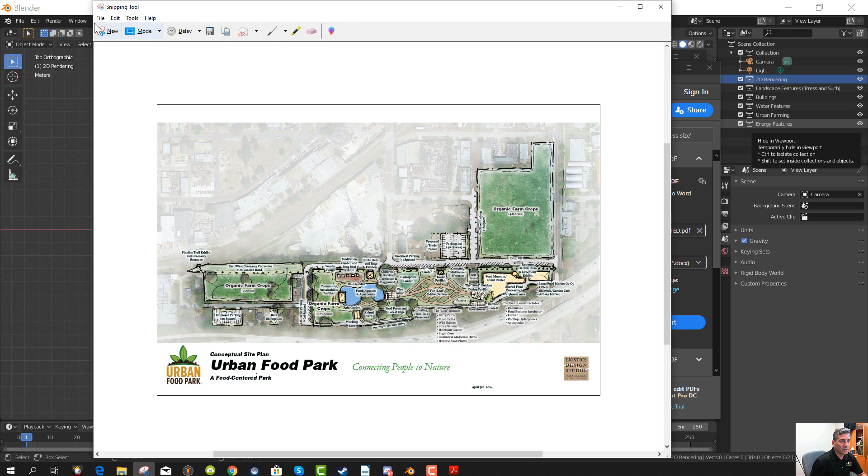Having taken that image, save it and find a place for it. Where am I going to do this work? I'm going to do this work in our Blender GIS files. A PNG file is fine, it's better than a JPEG for this kind of work.

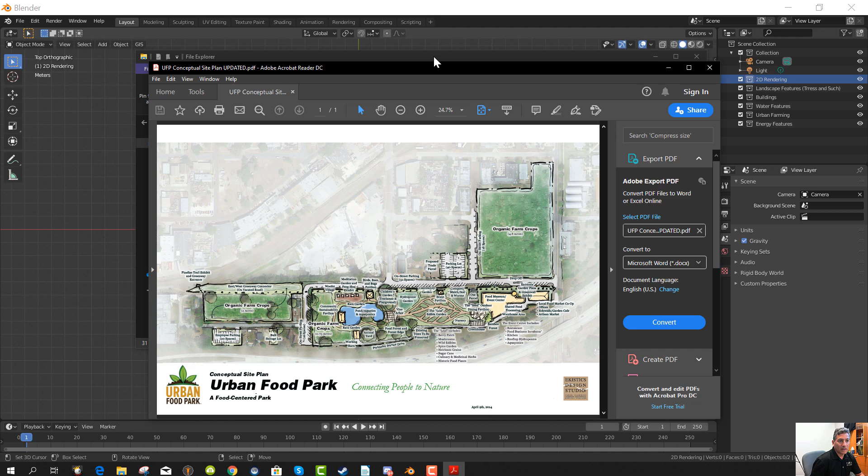So we'll call this Urban Food Park Conceptual Site Plan, that's what it is. A food-centered park, and bada bing, there it goes in there. We don't need this anymore, and we don't need this anymore either.

Because we're not using the PDF. And if I now go in File, it was in File Explorer and I couldn't find it, but let's do that again just to make sure we are in Blender File View. And I go to, it's no longer in Downloads, it's Blender GIS files, and it says export Rosebud, continue, urban food. There it is, the site plan, and load that reference image.

And there it is, way up there. So it's in the wrong place. So let me move it down, unless, well, you know what, maybe I should keep it there because while I don't think it has any GIS information, it'd be weird if it did.

So that is now in this collection, 2D rendering. And if I turn the 2D rendering off, it disappears. So I'll keep it there just for giggles.

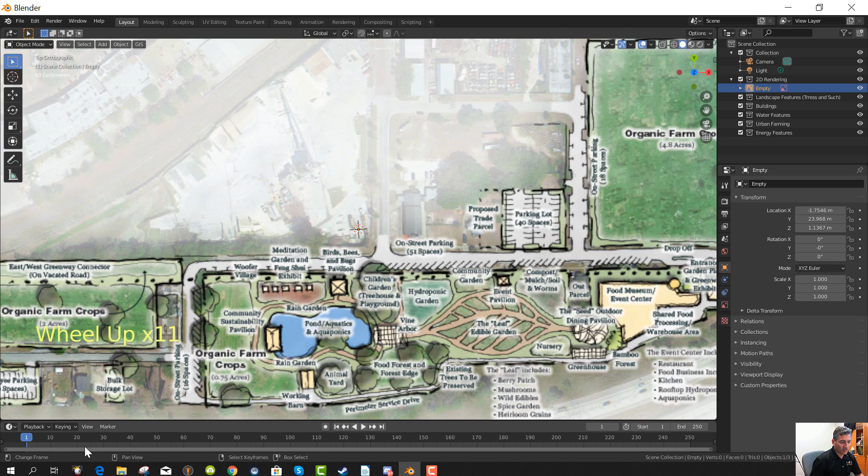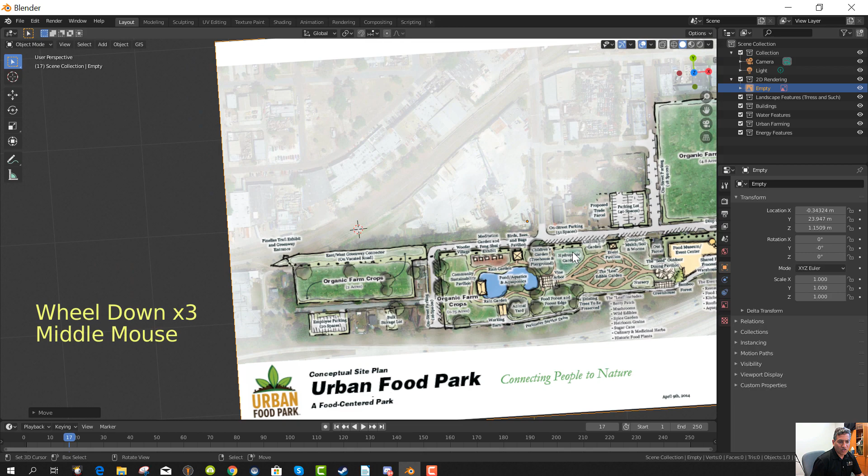Let me just zoom in here and see. So I hit the number pad 0 and look, what does it really say? Oops, I don't want to twist it around. It says, Pinellas Trail Exhibit and Greenway Entrance. So it's near the Pinellas Trail. Is there any other geographical information we can get off this to know?

It'd be nice if people would just tell us, but they haven't. It says on the outskirts of St. Pete. But we can play sleuth and figure that out. So in this case,

Let's go to, for the moment, let's go to Google and let's say Google Maps, as if I could spell Google Maps, but this machine is so forgiving, it does spell check for me. And let's go to St. Petersburg, Florida, and let's turn on the satellite image. And there's Pinellas Park.

And the satellite image should be coming up now. So the question is, where is this? And so to find out, we go to the documents they sent us, and we look at what they're telling us here, that the project summary says it's a community-based, vertically integrated urban agriculture and food complex, bringing together in a 14-acre park all aspects of the farm-to-fork food cycle presented in an engaging and entertaining format. It'll add cultural tourism destination to Pinellas County, local, regional.

It'll be operated as a zero-waste facility, enhancing St. Petersburg's reputation as Florida's first green city. It has edible botanical gardens. It'll be near the I-275 and the Pinellas Trail, and it'll connect and provide additional traffic to the existing Warehouse Art District and the Deuces, promoting the growth and development of surrounding neighborhoods. So they have this synopsis of all the different cool things that are going to be there, including health and nutrition, business philosophy.

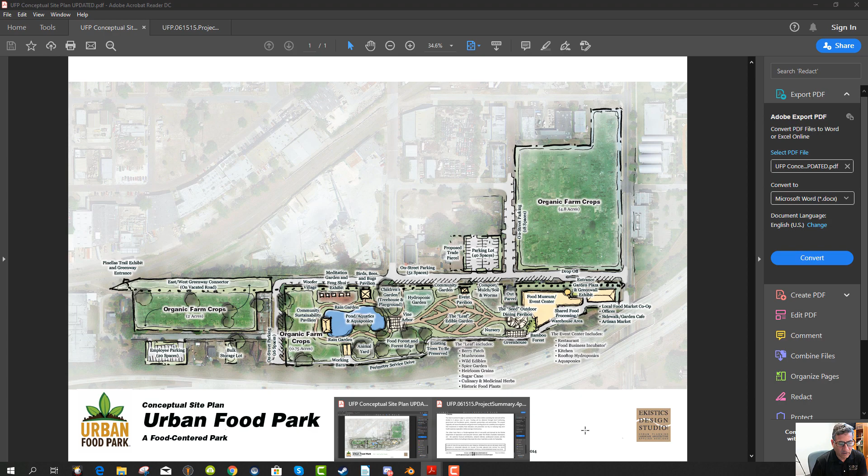So they say they have, in this document, there is also a Facebook group, Urban Food Park. So if we go to the Urban Food Park Facebook group, then we see information about it, and it tells you that its address will be an educational organic vegetable farm, the 15th Street Agri-Hood.

Now that might be what's already there. It might not be where they're going to develop this. So we still may have to do some hunting. But it gives us some idea of where they're already working. And if we click on this, we see the actual 15th Street Urban Agri-Hood that they've started. Hard to know if that's the actual place where they're going to do this project, but it gives us something to look at. And so we can take the address here, and we can now go into Blender, and I did this already, but I'll do it again because you should see how it's done.

So what I'll do is take my GIS, go to Web Geodata, to Base Map, Google Satellite, and so let me go back and show you that again.

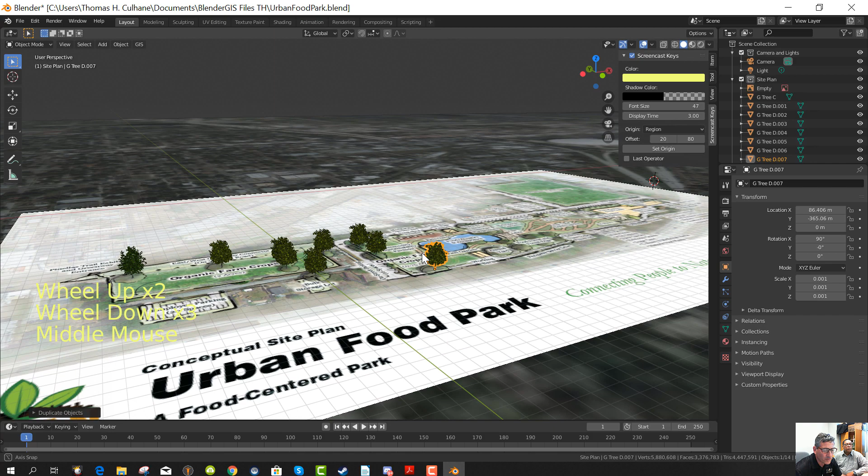Now another feature that's really neat about Blender's new edition with the GIS is that we should be able to go in and get building information and make our building heights, let's make them a little lower. I don't know if this is going to work or not, but we're going to try it and bring in these buildings. Did it work?

It did not work. Where are you getting the buildings from? GIS has it, they have the buildings. So something went wrong there, not sure what. Let me try it again. Building, go to my OpenStreetMap, click on buildings, elevation from objects, separate objects.

Maybe because the map is too big. That does happen, when the map is super huge like this, the buildings often don't come in. So the way to do that would be to get my buildings. So I'm going to temporarily... make the map smaller? Yeah, I got to make the map smaller.

And I don't know how to make it smaller once you've imported it. So I'm going to temporarily go into a new file, which is helpful if you've never seen how Blender works from scratch. Turn back on screencast keys so you have that. So I come in, this is what you get when you come into the program. You go 7 to be orthographic top view.

Delete the cube because you don't need it. In fact, for this purpose, we don't need the light and we don't need the camera because we're just doing the buildings now. Go to GIS, go to get that base map again, and in that base map,

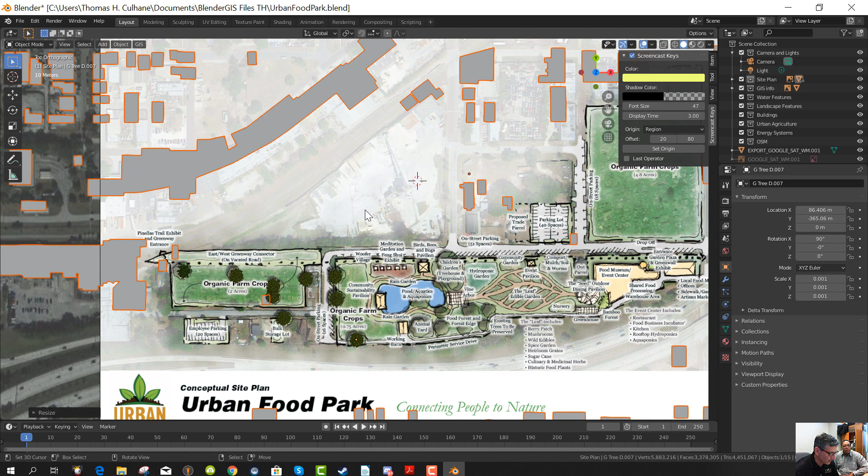But we basically now have the beginnings of a virtual version of that site plan. And all of these features, like rain garden, like trees, are easy, but these buildings don't yet exist. So if I wanted to, I could click off of this and zoom in. Whoops, stop it, shift key, all right.

And if I wanted to build the building here, I would go add mesh plane, move the plane if I can find it. Where did the plane go? Do you see a plane here? I don't see a plane here. I thought I just added a plane. Oh, there it is, there is a plane there.

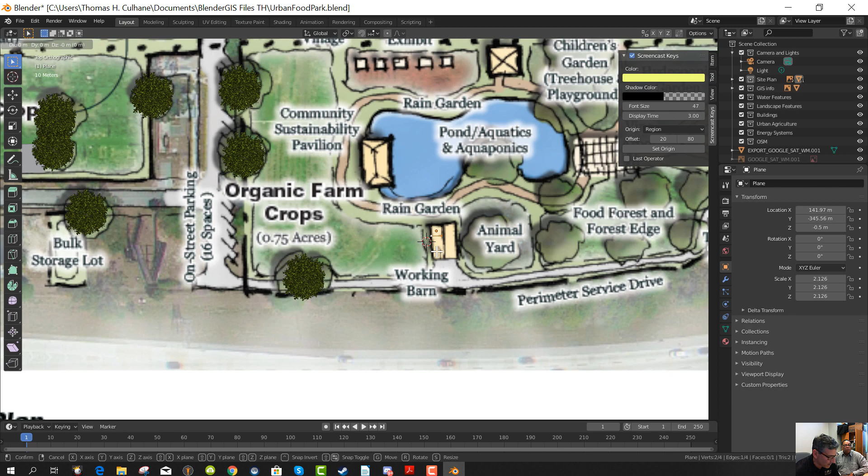Move that plane to here and scale it and move it. So it's this little game, the dance that you play. Go into edit mode and say, what I want is I want to take these two vertices and, whoops, not that vertex, deselect everything. Grab these two vertices and drag them down to make that building. Then come up in the Z direction and say extrude in Z, except I now need everything.

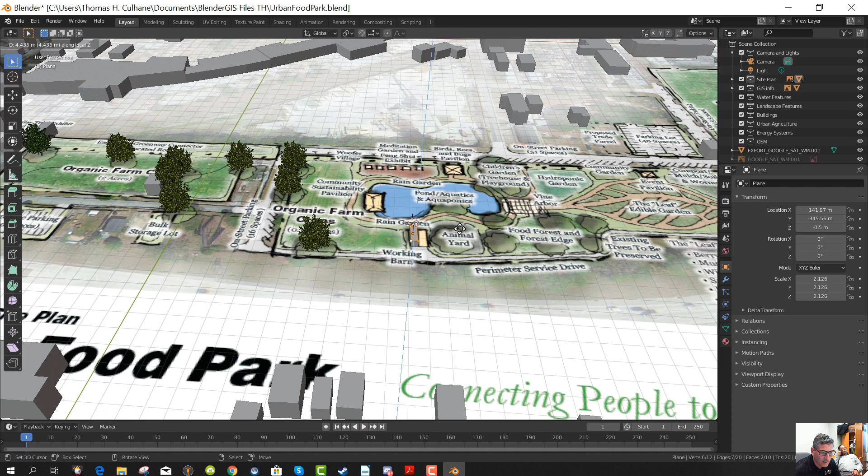Whoopsie, what happened to my plane? There it is, all right. Extrude in Z. And now what I've done is I've created two more buildings. So now I have two more buildings.

And I can select off of that and then do that same procedure again. I'm in TH's office, he's just showing me something on the computer.

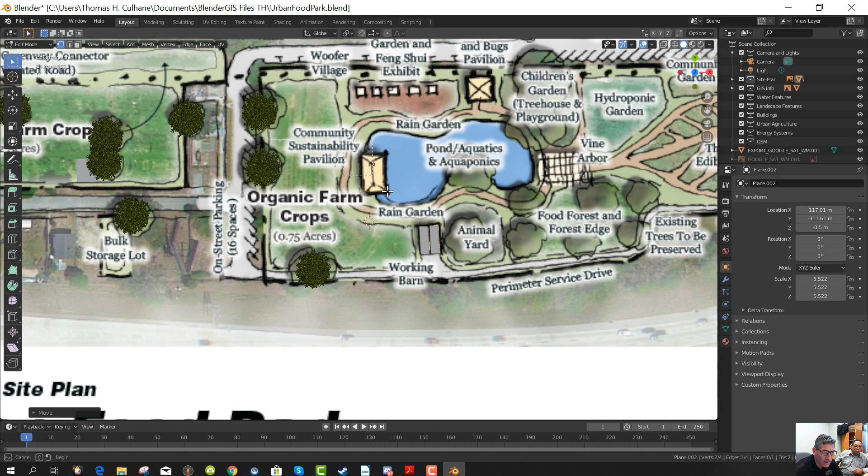A few minutes though, and then take that plane, move it up to here, scale it, move it over, go into edit mode, deselect, grab those two vertices, grab it and stretch it down to cover that building. Now go into select all those vertices, so I have the whole object selected, turn the camera, extrude in the Z direction and build that building, but you'll notice that that building had a roof.

So all I need to do to make a roof here is to hit W to subdivide, and now take these two vertices and do my grab—oops, I need both vertices, shift key there—take these, grab it in Z, and make a little roof, which is exactly what you see if you look at the actual site map: this one has a roof, right? So I just made a roof.

So now these buildings that do exist in St. Pete—we pulled these buildings from GIS, but these buildings we just made right now.

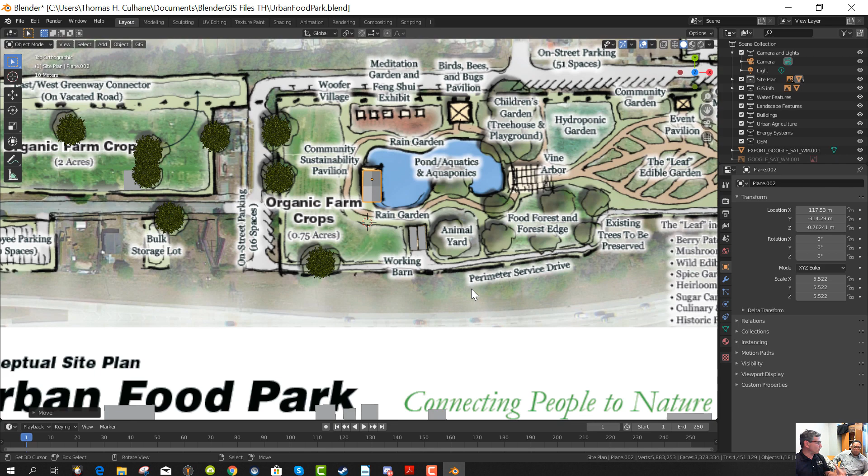And we can continue to do that with all the features of the landscape until we have the entire landscape populated, and then we can get into texturing it and making it look really pretty, adding the water features with the ripples in the water, and adding ducks flying. The last thing I want to show you, that David and I did last night, was in this world we have a camera. Where does the camera go? There's supposed to be a camera here. Where's the camera?

What just happened? Why is my camera way over here? What just happened? Okay, that's really weird. Site plan, zoom in. GIS info. Oh, there it is. So I don't know where my camera is.

When that happens, what I would do is delete this camera and add a camera of my own. Camera. And then the camera should have come in somewhere around here. And if I zoom to that...

Okay, something's astray. It's really thinking. All right, I got to figure that out. Anyway, the point was only going to be... What was the camera for? So I can take a picture of it to do my first rendering and do a fly-through. But something really weird is happening here, and it may be that—let me try to do this again. There it is. It may be that I've set my clipping wrong.

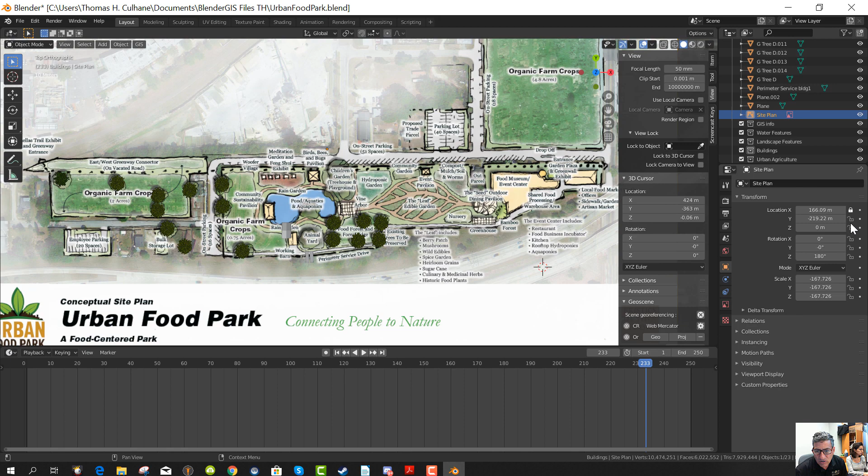So let me deselect everything by right-clicking, and let me now go to the site plan first of all, and lock its location, its rotation, so that ain't going anywhere, and lock its scale so we don't make it any bigger or smaller.

We're also going to take the entire map of St. Pete and lock its location so it's not moving or rotating or changing its scale. So that's locked, and the same thing would be true of whatever this extra texture is here. So now we know we're not going to mess around with that.

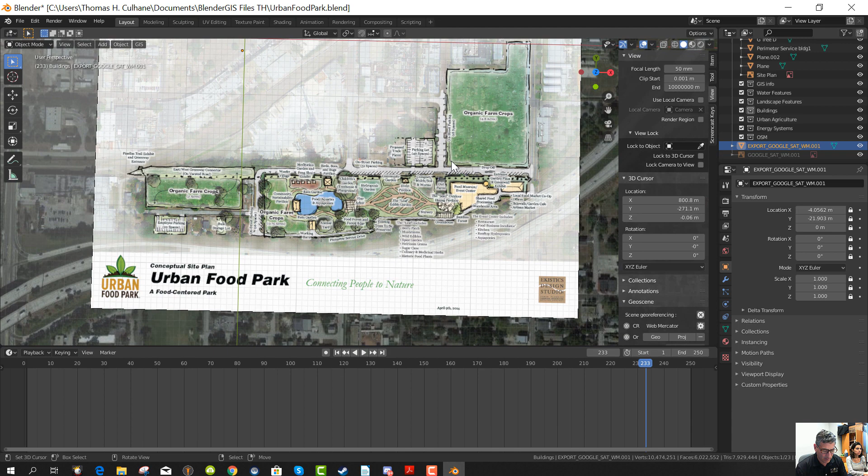And once we get the trees in place, we can select them if we can get to them. Sometimes it helps to go into this view and use your bounding box and select the trees. But it looks like we can't do them all at once, so we'll have to just go through and zip, do each tree.

It's very helpful if you can... oops, didn't mean to make a keyframe, so forget that, that's if you're animating. But lock them, and lock these, and you get the idea. So I've got to go through and lock all of my trees. And I can do that later as well.

And then the same thing with the buildings. With those buildings, the perimeter service building 1 needs to be moved over here. Buildings perimeter service... oh, that's actually the barn.

Okay, so working barn. Working barn. Then, whoops. Working barn is going to go, and it's going to be moved up to here, and then it's going to be locked in place by going again to the location, the rotation, and this here.

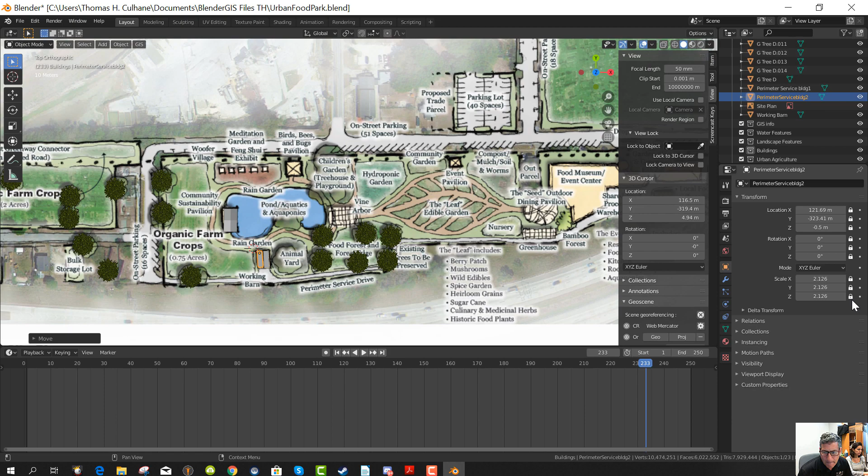And we're beginning to make some headway here. This jittery business, I'm not sure why it does that. It's fairly annoying. Maybe it's the focal length? Nah, it can't be the focal length. It's not the clip or the view.

It's just some weird artifact with the site plan that I can't account for. But we're not going to be using it ultimately anyway. It's just a reference. So in general, the site plan is going to be turned off, leaving us with the buildings and the objects there, so that when we do a fly-through, we see everything.

And why did the buildings disappear? Are they part of the building? No. Camera scene collection. The working barn is there. The site plan is there. Now the buildings disappeared.

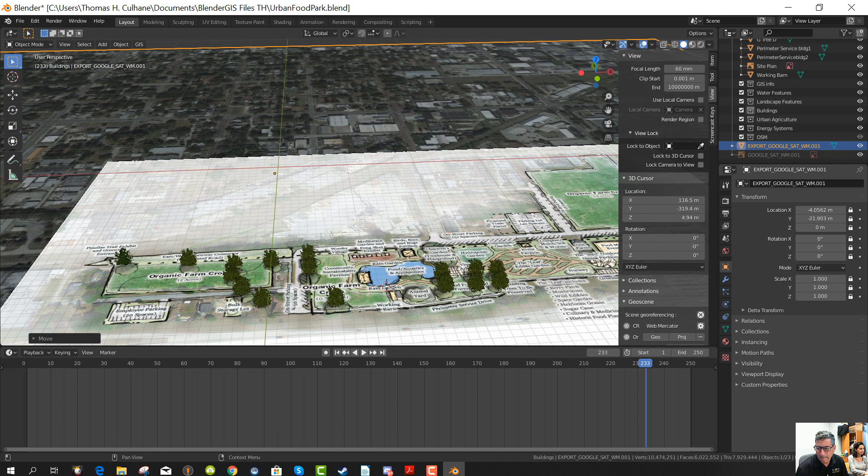It may be that my buildings got erased when I turned off something in here. Well, the buildings disappeared somehow, so I'm going to bring them in again because I made them as a separate file. So I will import my FBX and come over here.

The surrounding buildings, they come in, and are they in the right location? No, they're not. So hit G and move them, and once again, as we showed, we can place them over the image and bring them up a little bit.

So we're getting weird artifacts in rendering, and I'm not exactly sure what is causing that. It may have to do with memory, but if I turn off the site plan, it goes away slightly, but not completely. It has something to do with clipping, because it's such a big file.

Hit G and Z and move this down to the ground. And now the buildings are a little better. And when we get close, there isn't as much of a problem, but there's something with the rendering that's happening in here, and it's a memory issue for sure. We're using a large piece of real estate.